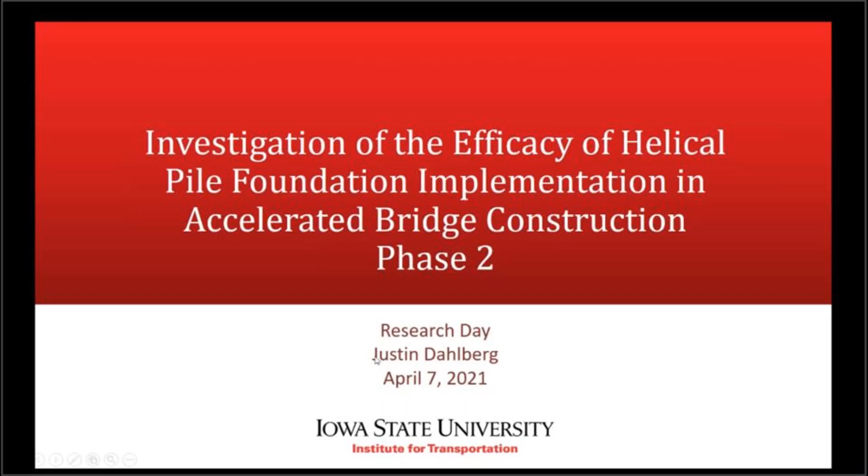We are going to move to our last stop, Iowa State University. We have two presentations, and I believe both are presented by Dr. Justin Dahlberg. The first one is investigation of efficacy of helical pile foundation implementation in ABC projects.

Dr. Dahlberg? Well, I hope to today just provide you an update on a project we've got going here at Iowa State, looking at the possible implementation of helical pile deep foundations for accelerated bridge construction. This is a second phase of a project that we wrapped up last year, just looking first into really the efficacy. Is it something that's worth exploring? What we found in our phase 1 study was that yes, it certainly is worth exploring. I'm going to give you, through these next slides, just an update of where we're at in the project and where we intend to go.

All right, so I'm sure that there's some people on the call who may not have been around for any of the previous research days, so I'd like to always touch back on a brief history of helical piles and their applications, really the technology behind it, so as to not get to the end of the presentation having lost anybody in what exactly we're trying to do.

So first and foremost, the big thing why we wanted to undertake this project is, we understand over the last 10 plus years, there's been many advances in accelerated bridge construction technologies. Those advancements have been primarily focused on bridge decks and superstructures, and to a lesser extent, the substructures. That being said, I think there's a real opportunity to look at bridge foundations and the possible acceleration of their construction to further advance accelerated bridge construction technologies.

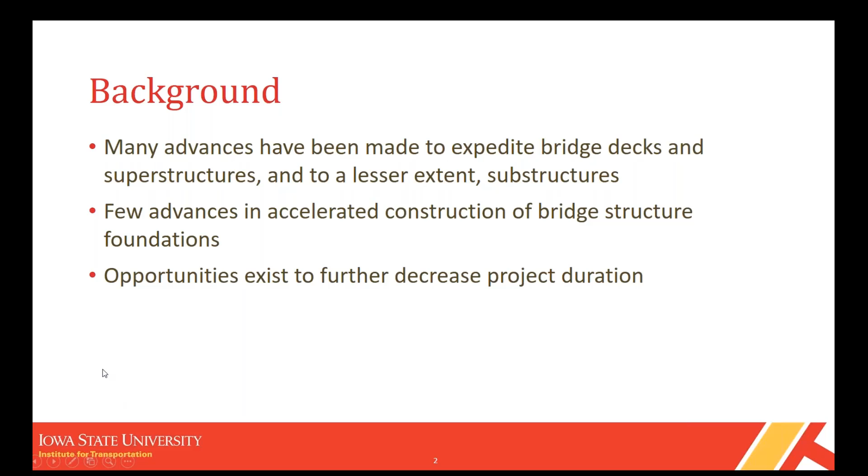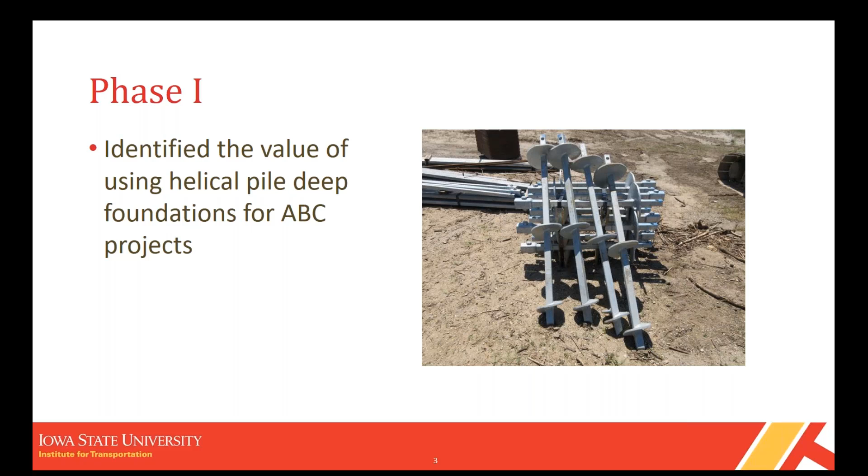So in our phase 1 part of this project, what's shown here, we set out to identify really the value of using these helical piles for deep foundations. First, is it a technology that even lends itself well to bridge structures in general, and furthermore to accelerated bridge construction projects? And if so, how might that be, and what advantages exist? Having found inherent advantages in the technology, we pursued a phase 2 where we can now advance the technology just a little bit more in bridge construction.

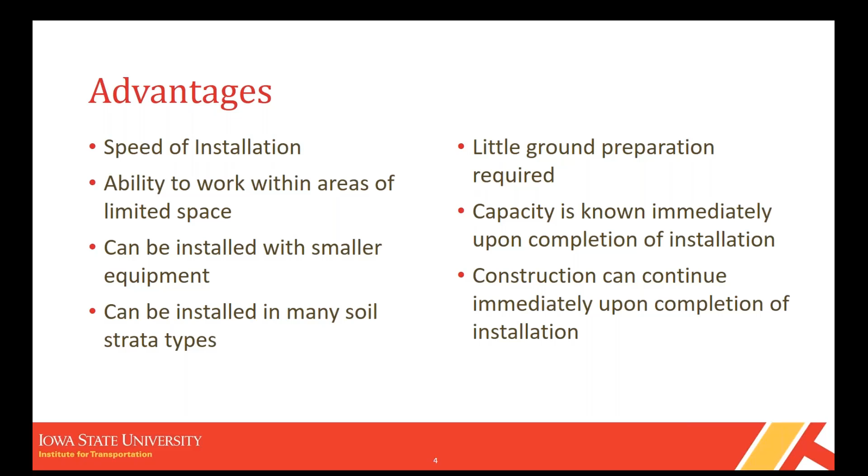So as part of our phase 1, we had an opportunity to participate in a bit of a demonstration. A company just north of us here in Minnesota came down and installed some piles where we were able to watch their procedure. So I'm going to just show you a couple pictures here in the next slides, but before I advance to the next slide, just want to give you a real high-level overview of what's involved here.

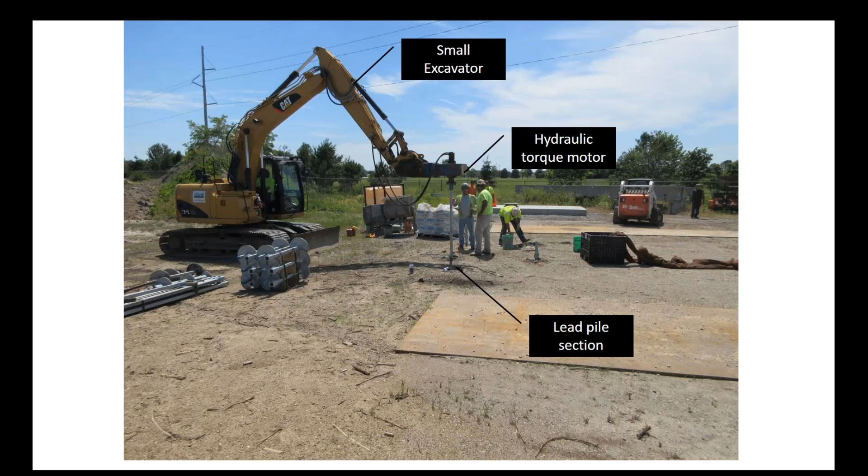So you can see there on the left, a small excavator was used that provided the hydraulic power to the hydraulic torque motor that's indicated there in the middle of the photograph. The hydraulic torque motor is connected to, in this case, a lead pile section, which has several helices welded to that central shaft, and it is advanced into the ground just like you would advance a screw into, say, a board if you were building a house. The next slide here is just another view of the hydraulic backhoe that was used in this application.

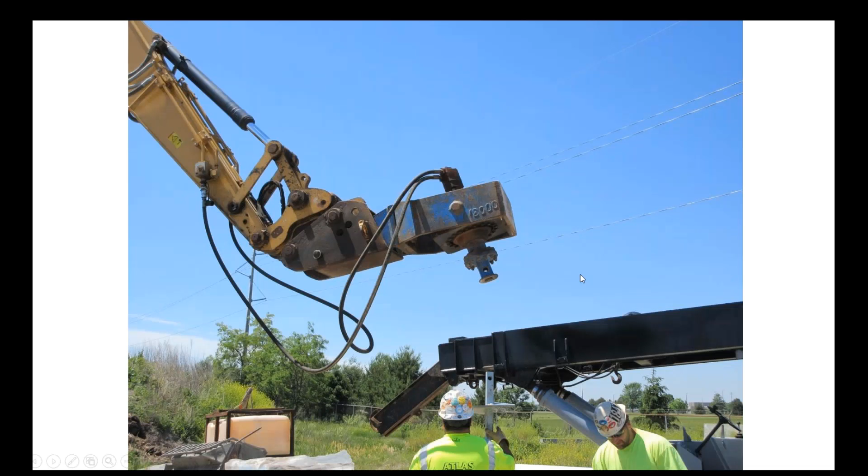Here's a close-up of the hydraulic torque motor. They're positioning it currently above the lead helice section and preparing for the advancement of that first section.

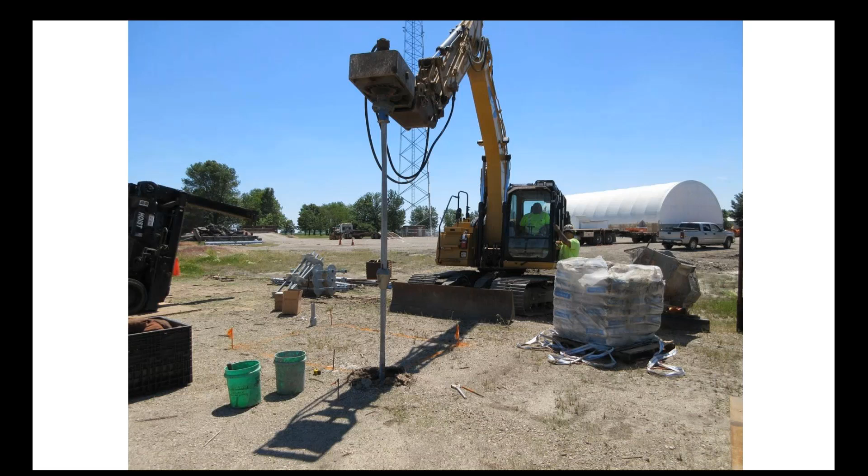And then I think this is our last photograph to look at, but what we're looking at here is the lead section has already been advanced into the ground, and a couple of extensions have been coupled to the lead section. Simply put, they're about 10 foot in length. They advance it into the ground, couple another section, advance it another 10 feet until ultimately they achieve the bearing capacity required for that pile.

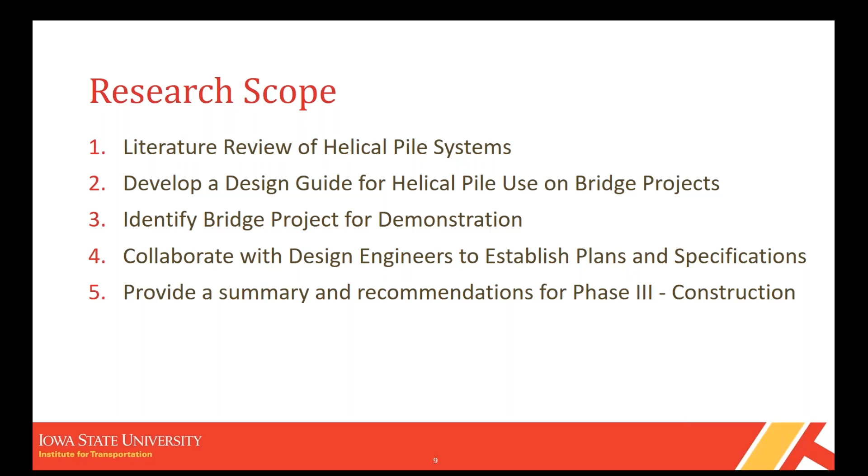Once that is complete, or even in conjunction with that task, we are identifying a future bridge project that could be used for demonstration. And then with that identified, we aim to collaborate with the design engineers to establish plans and specifications using helical piles. Our last objective here then is to provide a summary and recommendations for a potential phase three, which would be the construction of that demonstration bridge.

So currently there's a lot of resources out there for helical pile foundation design. The building industry has really taken this and advanced it in many great ways. Since about 2009, helical pile technology has been included in the International Building Code. There's several major players in the market who have produced their own technical design manuals. In 2019, the Deep Foundations Institute put out a helical pile foundation design guide. All that to say, there's a lot of history behind this technology that can be used in advancing bridge construction.

Really the big leap here is taking it from a vertical construction focus to bridge structures. To date, there's been very little effort put towards codifying helical piles in bridge construction. So outside of the scope that I just spoke to, that's really one of the main objectives: how can we, pardon the pun, bridge the gap between the vertical construction industry and bridge construction industry. It's one additional option that designers will have for deep foundation structures. And speaking again to the advantages of helical piles, there's inherent advantages to the speed at which these foundation structures can be installed.

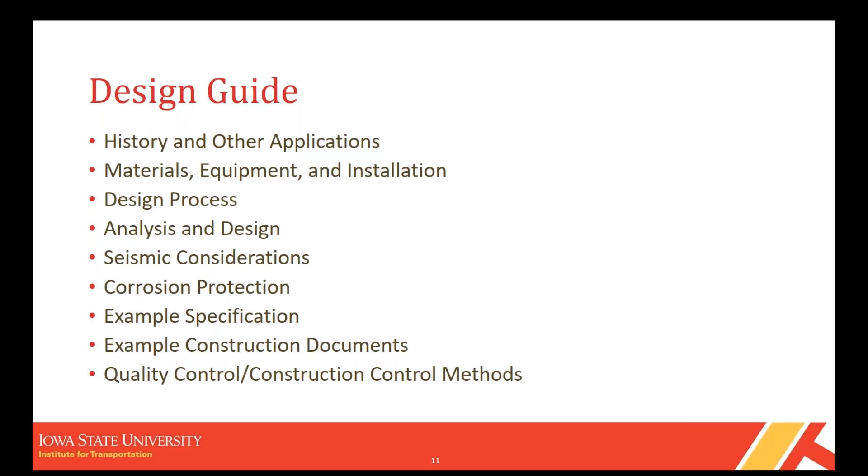Additionally, we have some seismic considerations, corrosion protection, and then we do provide an example specification and an example construction document. Finally, we have included some quality control and construction control methods. Like I said, that's where the bulk of our effort is currently.

We've also been speaking with a county engineer here in Iowa who is also a representative on our oversight committee, to identify a project here in the state of Iowa where we can work to develop plans and specifications and potentially have a demonstration project completed here in the next year or so.

As part of that, we would aim to develop these specifications such that it would mimic an accelerated process, right? On a county level bridge, certainly the need to accelerate the process is less than on a mainline thoroughfare. But we would want to still understand what it would mean for the process to expect an acceleration behind that.

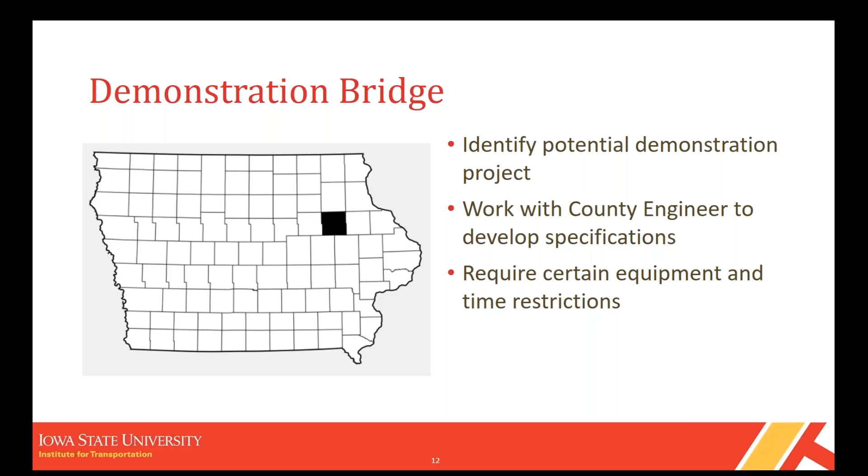So just to wrap up then, my final comments are, as I mentioned, helical piles have a long history of being used in other structure types. We're really trying to show the efficacy of using them for bridge structures. There's a real opportunity to continue to expedite bridge construction through their use in deep foundations.

And really one of the big things we're trying to do now is provide bridge specific documents that would continue the effort towards codifying this foundation option. Like anything, it's got to start somewhere, and we continue to pursue those efforts towards making it maybe a more common selection for bridge structures.

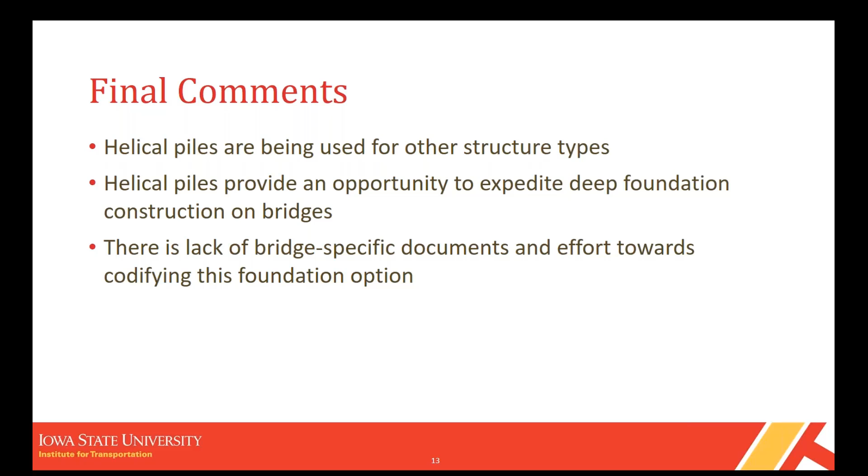Thank you, Dr. Dahlberg. It's definitely something new for bridges. Am I right to expect that this will be for, let's say, smaller span bridges, as you are targeting the county bridges like that?

Yeah, so the short answer is yes, but that's not to say that the capacity doesn't exist in these piles. It certainly wouldn't be sufficient for very large bridge structures. There's other foundation options that have their place there, but I think right now, what you're seeing with the targeting at the county level is just the need to demonstrate it outside of what one would consider a major bridge project.

Just prove its value, its worth, its efficacy, and then once it's better understood, and once the comfort level is there, I can see it advancing into more of a state level bridge structure.